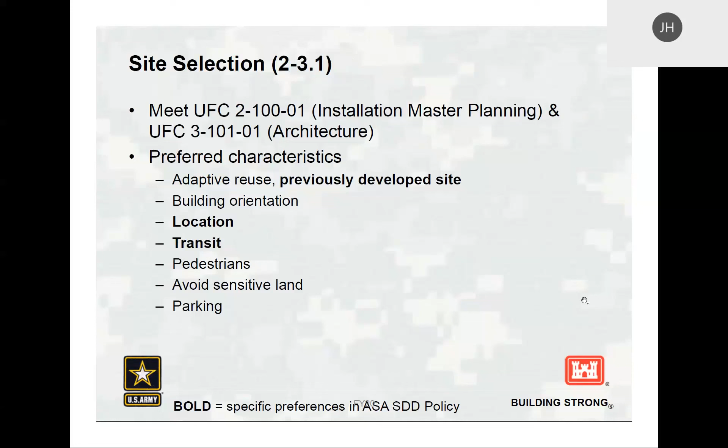Another thing that we're going to do today, as we're going through the UFC, is we are going to do a little bit of a cross-reference to LEED-related credits when it comes to each of the areas that we'll talk about in the UFC. And I do want to make sure that we know that what's in the UFC, that is our governing criteria, governing requirement.

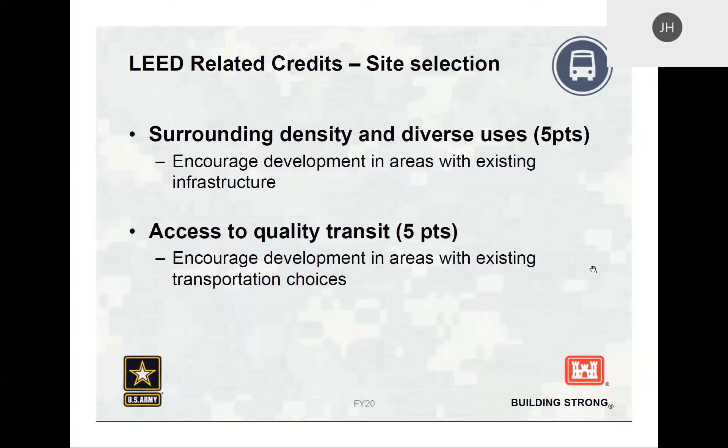Besides site selection, LEED also has credits related to site design. Some of the items we can incorporate into our site design are things such as bicycle facilities, reducing our parking footprint, and locations for green vehicles, ones that use alternative fuel sources.

For the bike requirements, if you're not familiar with LEED, we want our bike facilities to be within 200 yards of a bike network, to have short-term bike storage within 100 feet of our main entrance, long-term bike storage within 100 feet of a functional entry, and we want additional storage and shower requirements for the facility as well.

For the reduced parking footprint, we don't want to exceed the minimum local code for parking capacity, but we also want to provide a percentage reduction below the recommendations of the Parking Consultants Council.

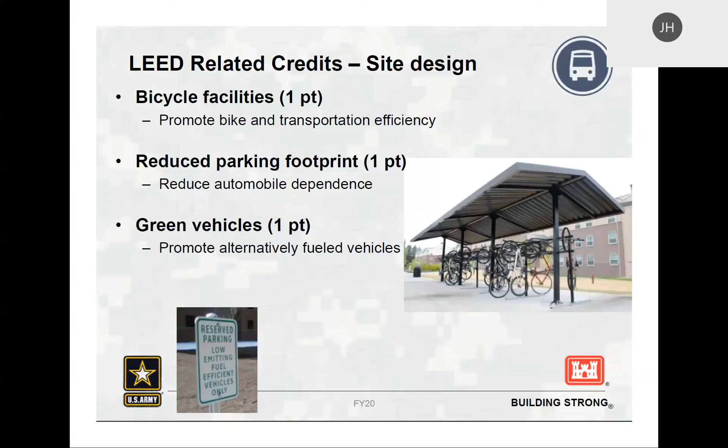For green vehicles, we want to designate a minimum of 5% of parking spaces for green vehicles, and we want to install electric vehicle charging in 2% of those spaces, or have liquid gas or battery facilities in 2% of spaces.

A couple more credits related to LEED for site design. For site development, we want to protect and restore habitat - that's worth 2 points potentially. What we're doing there is promoting biodiversity, and we want to try to restore 30% of the site identified as previously disturbed. Or we can also donate 40 cents per square foot for total site to land trust or conservation organizations in the region.

Another credit for 1 point is related to open space. With open space, we're encouraging interaction with the environment. We can do that by providing outdoor space that's greater than or equal to 30% of the total site, or a minimum of 25% of the site must be vegetated.

So when you look at LEED for location and transportation and sustainable site credits, we have a possible 26 points for how we locate our site and some of the design features that we can add to our site, out of 110 potential LEED credits.

When we break down those 26 possible points, 14 are impacted by our initial site selection - those factors of initial site selection can impact 14 of those credits - and then 12 we have design features that we can add into our site that may influence those credits as well.

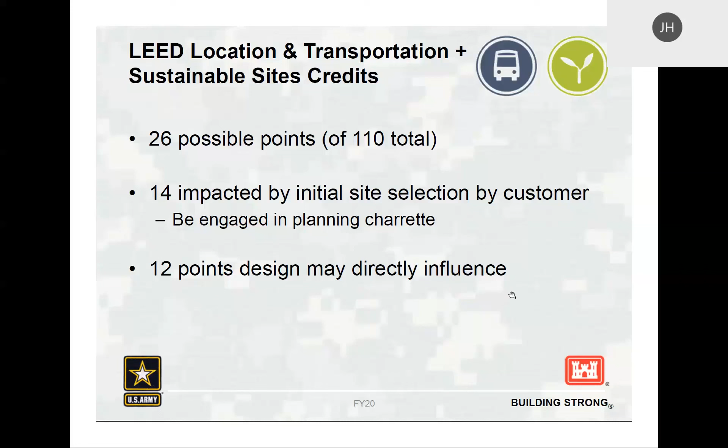All right, so focusing back to our UFC 1-200-02, our next section that we're going to look at is mitigating heat island effect. That's 2-3.2.

For those of you who are unfamiliar with heat island, I just want to make sure I'm not being presumptuous that everyone knows what that is. Heat island is the tendency of urban areas to be warmer in temperature than their surroundings. There's a lot of different reasons for that, but typically urban areas have less green space than open farmland or non-urban areas, so there's a tendency for them to have a higher temperature. We're trying to minimize that through our site design, and there's a couple of different strategies that the International Green Council, Green Construction Code, has identified as ways to mitigate the heat island effect.

And the first is through our hardscapes. Hardscapes are landscape features that are impervious or less pervious than just open land. What they've dictated is that 50% of site hardscapes should have existing or new trees to provide shade on them. So if we're going to have hardscape, we want at least 50% of them to be able to be shaded by trees that are either existing or new.

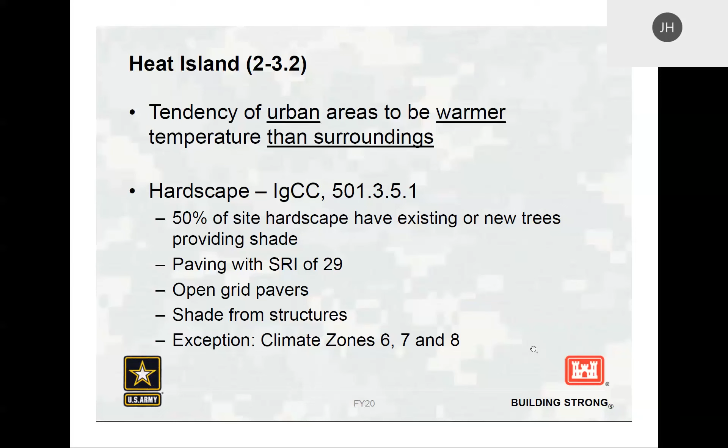One of the other ways that we can mitigate heat island effect is through walls. So if we're talking about the requirement for shading of walls, we want to shade 30% of our east and west above-grade walls up to 20 feet.

And 75% of opaque wall surfaces on the east and the west should have materials that have an SRI, solar reflectance index, of 29 or greater. And once again, we have some exceptions in areas where we don't get as much direct sunlight. So some of those climate zones 5, 6, 7, and 8 for the east wall, also climate zones 7 and 8 for the west wall. Shading is not required.

For roofs, the International Green Construction Code talks about trying to achieve a specified SRI, solar reflectance index, for roofs, and that depends on whether or not our roof is a flat roof or a steep slope roof. For flat roofs, we want to have an SRI of 78 as a minimum. The higher you go, the more reflective that surface is. So for a low sloped roof, we want more reflective surface. If it's a steep slope roof, then we need an SRI of 29 as a minimum.

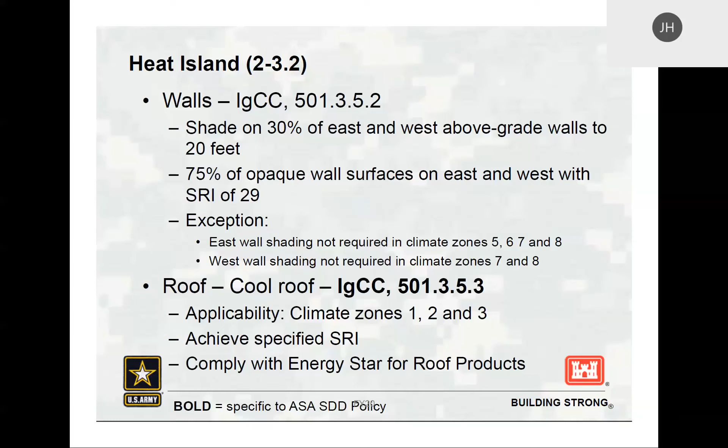So just a couple of pictures of some of these strategies for reducing heat island effect. The hardscape strategies we can use include planter boxes, things like that, where we're going to have hardscape but get some relief by having trees planted for shade.

We can use reflective paving. If you look at the picture here on the left, some of the pavers used there are really light, so they have a higher reflective index. And then we can also use an open grid paver system where we might have some kind of pervious material, whether it's grass or some other pervious material inside of that paver, to make it not quite as much total hardscape and have an open grid.

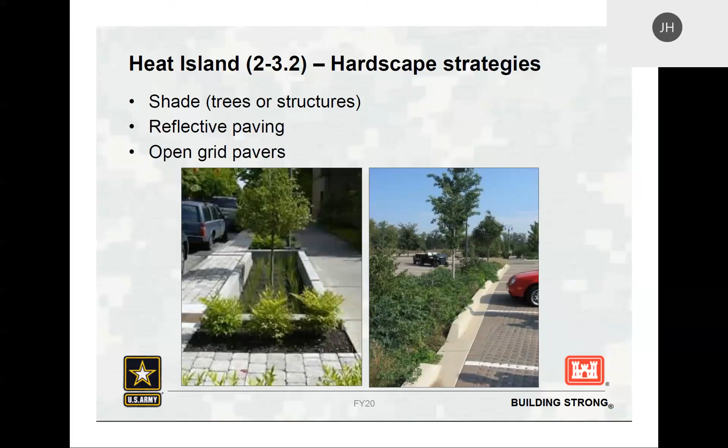Pivoting back to LEED and related credits when it comes to heat island reduction. The requirements for heat island reduction offer a possible 2 points, and we can achieve either 1 or 2 of those points: either we meet an equation for percent of hardscape with shade or reflectance to get 2 points, or if we place 75% of our parking under some sort of cover that's reflective, vegetated, or used to generate energy, we can get 1 of those 2 points.

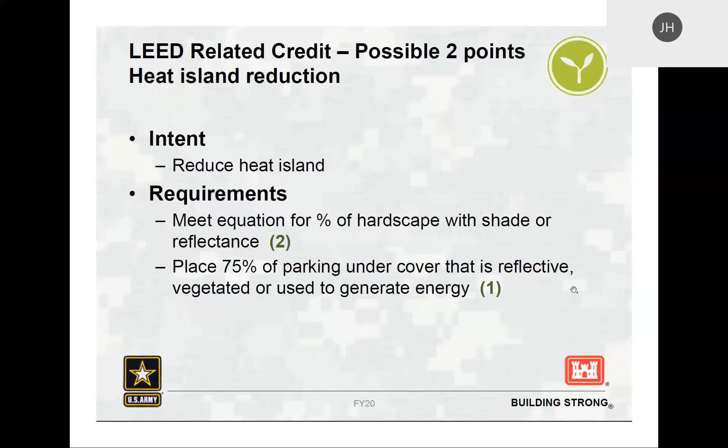Going back to the UFC, the next section under UFC 1-200-02, Chapter 2, is reduction of light pollution.

It's a good example of when you look at areas of high lighting density, just how much you can have as far as light pollution. What light pollution does is take away the ability to enjoy the night sky. If you've ever been in a city and tried to pick out stars or look up at the night sky, it's not quite as enjoyable as if you are on a mountaintop in the middle of nowhere and can see as many stars as you can imagine. So what we're trying to do with light pollution regulations is enhance that night sky experience and not have it hindered by things such as overlighting and non-directed lighting.

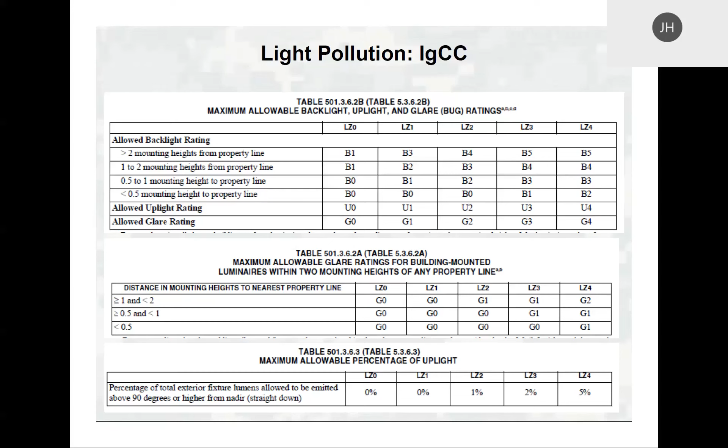The three main design considerations when we're talking about light pollution are glare, overlighting, and uniformity. Glare is not having our lights positioned in a way or location that's causing stress on people's views. Overlighting is having that lighting directed so it's applicable for the task it's intended for, and doesn't cast light into areas and views where it's not supposed to. And uniformity is so that we have a continuous and typical amount of light, so we're not casting large amounts of foot candles in one place and then having it vary back and forth.

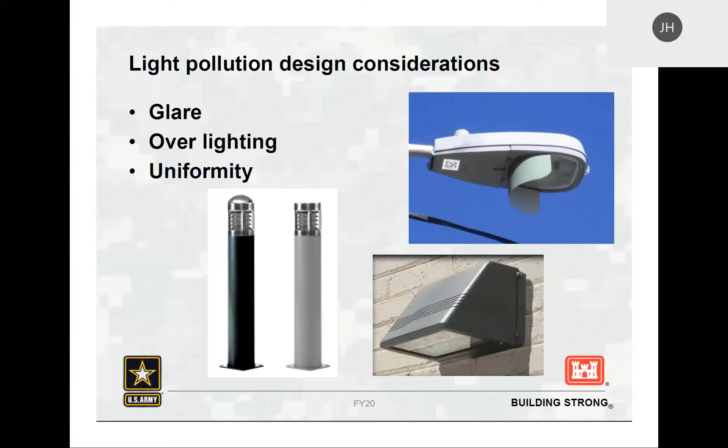So what you'll see on this slide and the next one are just two examples of lighting intensity. And so what you see is this is one for a building site. The next one you'll see is for a roadway intersection. So obviously along our building site, we have our lighting in certain locations, and the lighting intensity is brightest there.

And then our hope or the intent of limiting light pollution is that it's intense in the locations where it needs to be. And then as we get away from the areas where it's needed, we want it to drop off dramatically so that it's not overlighting locations where we don't need that same level of focus. So here we kind of see we have our building here. So we have lighting that goes around the perimeter of the building. We have lighting in our parking lot and along our entrance ways to the facility.

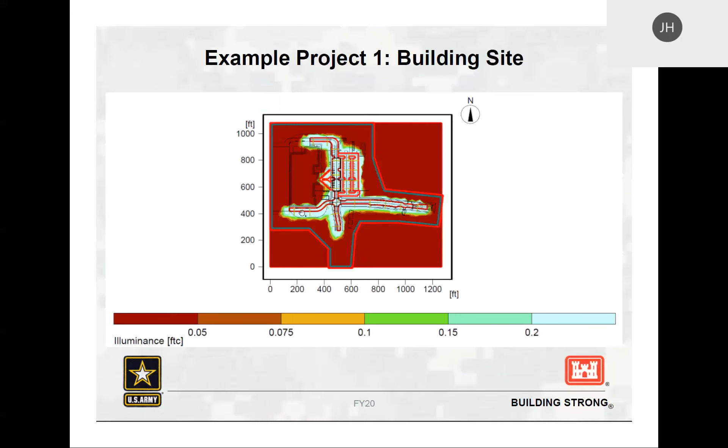We're looking at a roadway intersection such as this picture. We have lighting intensity leading up to the intersection, and then as we get a certain distance away, we want that to drop off so our intersections aren't casting light out farther than for those traffic interchanges.

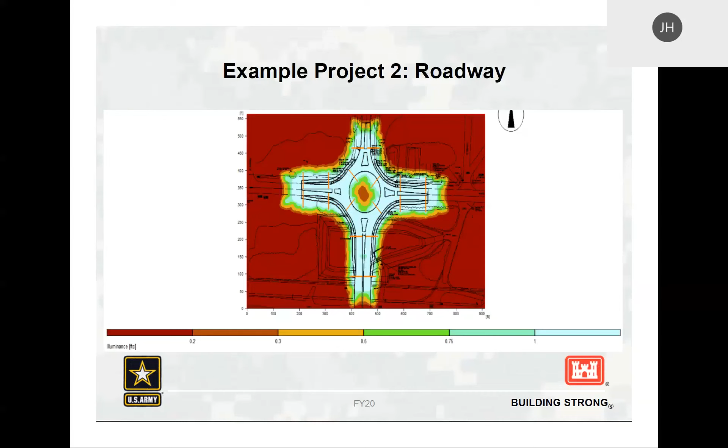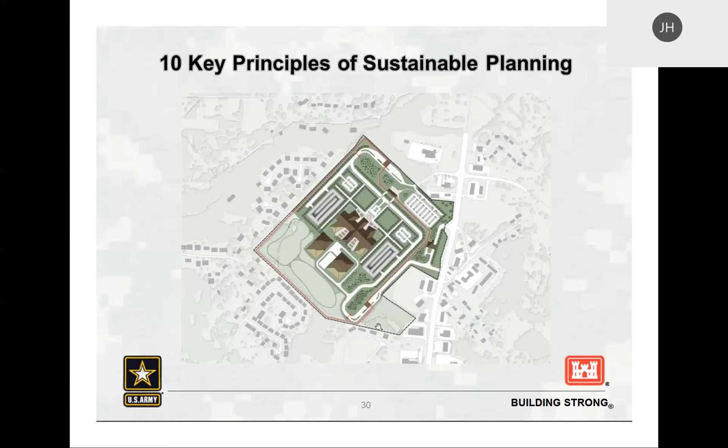So the first key principle is compact development. You wouldn't always know this because some installations have land for miles and miles, but installations really do need to conserve their land resources. Land is a commodity that we can't get more of, unless you are in certain countries where they try and build islands. But we are not one of those here in the United States. We have a limited amount of land, and so we have to conserve our land resources.

Whether that's installations reconfiguring current land use patterns or transportation systems within their developed areas to create opportunities for future development, we need to adjust that way of thinking. It's not to say we've got a lot of land, we're just going to sprawl out bigger, wider, more horizontal. We might need to look at more compact development patterns, whether that's multi-story buildings, greater residential densities, mixed uses, minimal space between buildings while still maintaining our ATFP requirements, or other constraints. We have to get creative. Compact development should be one of our key principles when it comes to master planning for our sites.

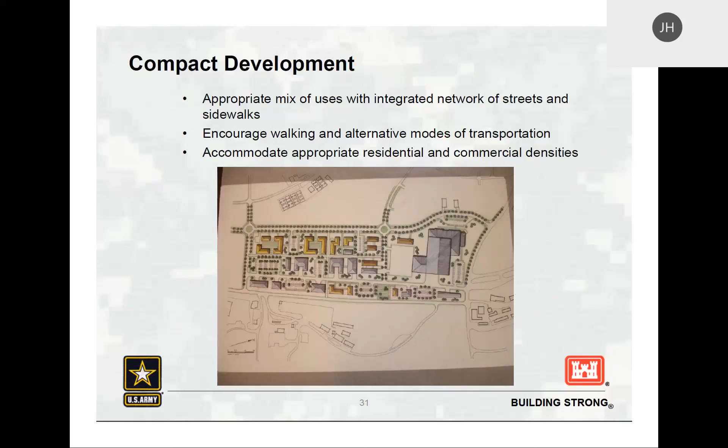Infill development. Infill development is where we plan development within our installation core. So not sprawling out farther and farther to the extremities, but forming an installation core and using previously developed land when possible. Typically, as we get out from that core, we're going to use more green space, so if we can avoid that, we can leave that green space in its current state. That might require removing or replacing aging or low density development with higher density development when needed.

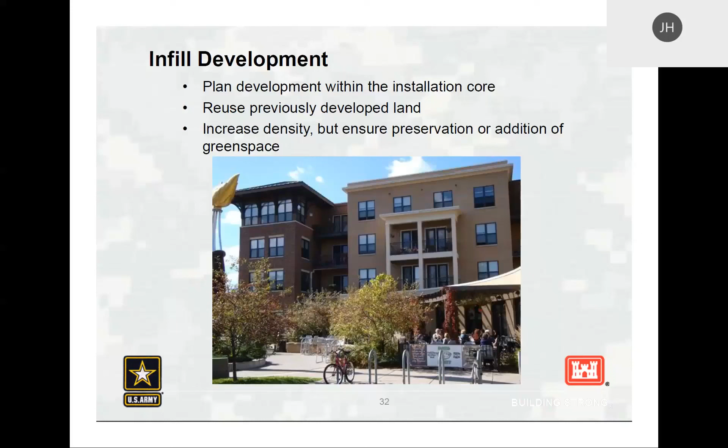This one, for military installations in particular, might not be as applicable, because we can't always control the location of our military installations, and some aren't right next to a major transportation hub. So transit-oriented development is a key principle, and when it's available, we want to place our development around transit corridors and places where it's readily accessible, but it's not always an option for all localities.

So, Jason, this is one item that ultimately varies a lot from installation to installation, but it can be applied at various scales. I guess maybe the point would be that even if it's a minor victory, placing a facility on a site that's got better access to transportation, whether that's public transportation or just established transportation corridors and things like that, may be a victory rather than placing it on a new greenfield, which, speaking from my experience, seems to be the more common trend on new MILCON type projects.

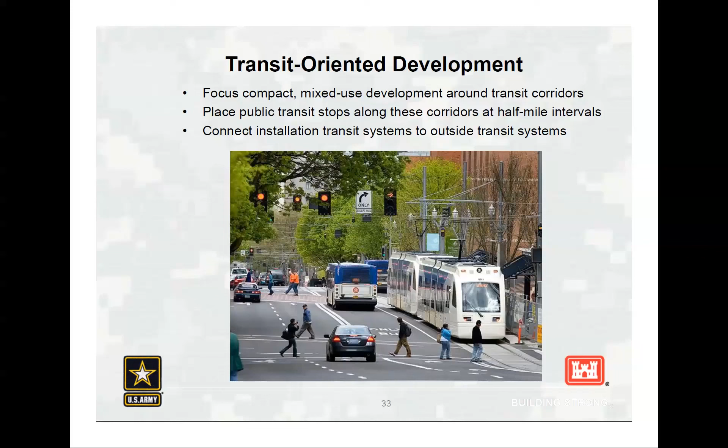All right, another key priority is vertical mixed uses. And so really this is one, like I said, for master planning, planners should locate compatible uses within the same building, which can be difficult in some of the MILCON that we do, because when you're talking about mission or funding variables, sometimes it gets a little bit tricky. But if we can achieve vertical mixed-use development, we need to try and synchronize that if we can.

An example would be if we did vertical mixed-use construction where we'd have maybe a ground floor education or training facility and then some kind of unaccompanied housing above it, where we could incorporate vertical mixed uses to maximize the use of the footprint that we're going to take out. All right, and then vertical mixed uses. Like I said, if we can maximize that footprint and have synchronized future projects that can build upon each other, we should always try to do that.

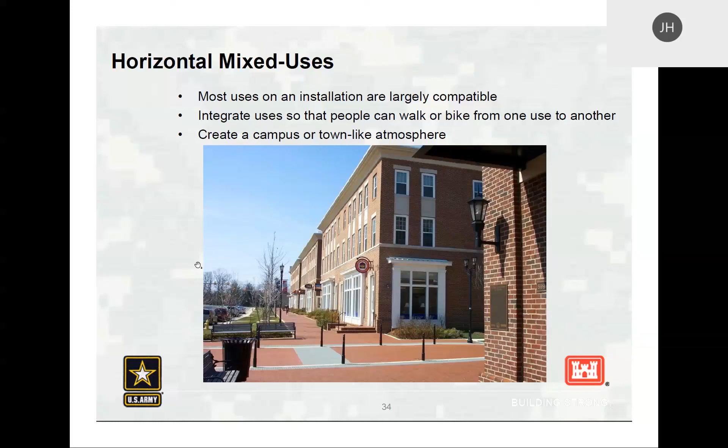So another one of our priorities is using connected transportation networks. A connected transportation network of sidewalks, pedestrian pathways and bicycle trails reduces the distance between origins and destinations, and it increases our transportation alternatives.

So if we only give people the option of driving a vehicle, we're going to have the maximum number of vehicles. If we give people connected transportation networks where they can use bikes and walking, those options will reduce the number of vehicles on the roadways in those areas. So whenever we can, we want to have connected transportation networks and diversity of those networks so that people can maximize all the options.

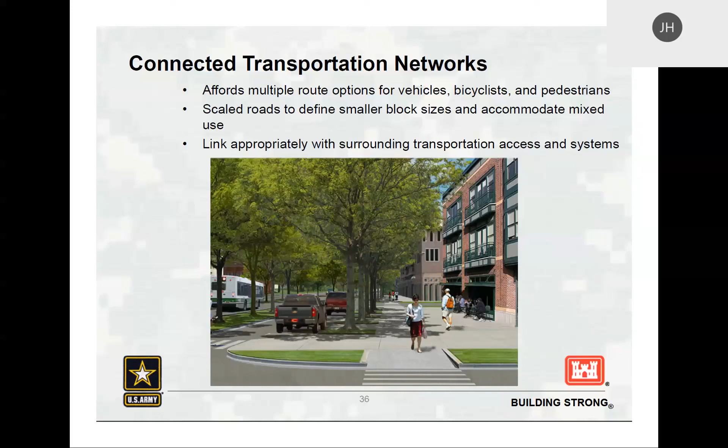We want to use sustainable landscape elements. And this is using street trees, shrubs, ground cover, and using plants that are suitable for the climate conditions and conserving water resources in the area that we're using.

And I would say from another perspective, when it comes to planning, not just using sustainable landscape elements, but planning to include maintenance of those sustainable landscape elements. I've heard it multiple times, and more times than I care to since I've come to the Corps of Engineers, but we're really good at building new things, and the military is not very good at maintaining new things. And so we would rather tear something down and build it new than maintain it for a long time.

And so I think that also applies to our landscape elements, whether it's bioswales or tree plantings or planter boxes or whatever it happens to be that we're using as a sustainable site landscape element. We need to put in place maintenance of those elements as well so that they function the way that we design them for sustainability, so that they are sustainable for the long term.

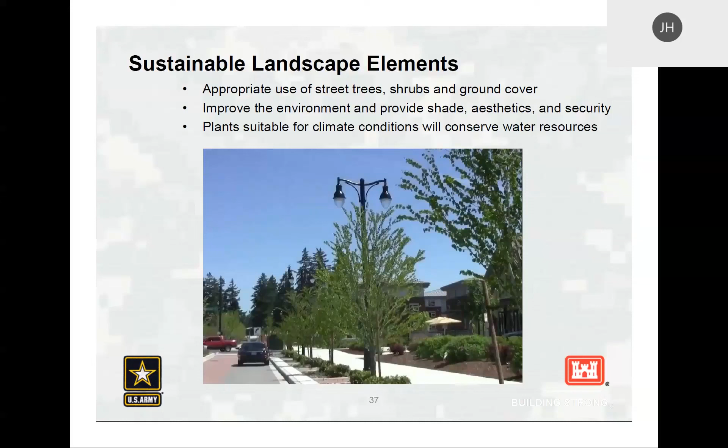And another part of our site development is low impact development and stormwater management. And so for low impact development, we're really trying to use as much as we can on-site natural features to control stormwater runoff quantity and quality. And our low impact development is governed by UFC 3-210-10.

And so, one of the ways that we can do that is to add 10% additional site to allow integrated management practices and identify those additional low-impact development costs on the 1391 during project planning, so that we have the funds in place from the very beginning.

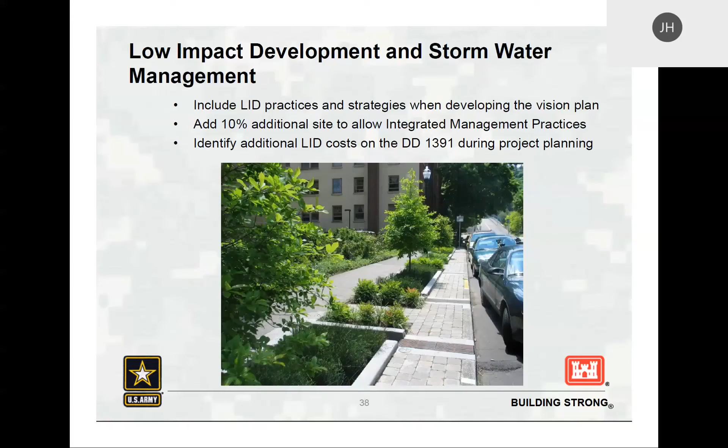Another key priority would be multi-story construction. And, like I said, since land is a valuable and scarce commodity, whenever we can do multi-story construction and maximize the square footage we're getting out of that footprint, the better from a land use perspective. And land efficiency improves so much with that multi-story construction.

And a lot of times people say, oh, well, we don't want to trigger the progressive collapse requirements by going over a certain number of stories. But if we limit ourselves to 3 stories and less, we are going to eventually find that condition is unsustainable from the land access and land availability standpoint. So if needed, planners and programmers should combine multiple users in multi-story buildings whenever possible.

So, for example, the campus that I'm on right now, one of the things that they really wanted to do was have a joint operations center, because currently the cyber commands of the military entities are all kind of in separate places and have their own facilities, and they work together, but NSA thought, well, if it's possible, why can't we put them all under the same roof?

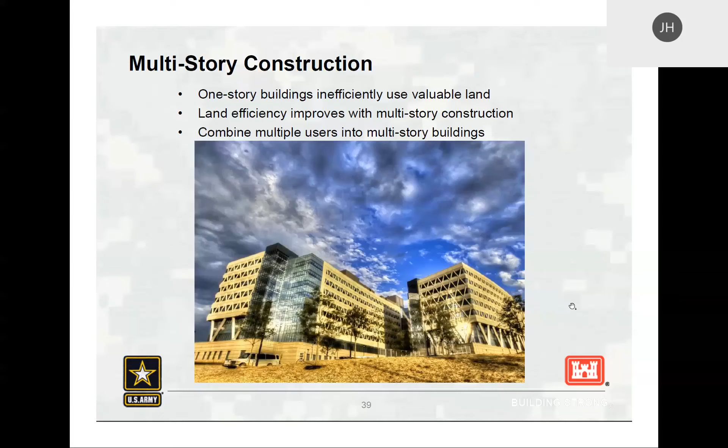So now they still have their own missions, but they can all be together and collaborate that much more easily, and we can put them all in one location where we can maximize the footprint of that facility. So one of our projects on campus does just that, where we combine multiple users into a multi-story facility.

So, Jason, I was just going to add, I see a comment here: progressive collapse is often an issue to overcome with multi-story. I think that's valid. It's something that has to be overcome, but a lot of times I'm not sure that it's an issue that's fully vetted at early stages, and it may impact your site selection. I've been in the room where the conversation is, going 4 stories, or 3 stories even, would require progressive collapse, so therefore we're going to avoid doing that.

That's probably not enough investigation, and especially early on in the planning process, you could give maybe a little bit more serious thought to the trade-offs between putting a taller building on an existing site versus a shorter building on a greenfield or something like that. There might be some real cost-benefit trade-off to be done there. Yeah, exactly. And yeah, that's one of those conversations that needs to happen early on, and if we can do that, we can look at the benefit and cost of that.

So the last priority from a master planning perspective would be building orientation and configuration. And I feel like from a site standpoint, this is one where we can really have an influence by the site that we select. And so if we can plan our sites to provide flexibility, it allows us to do a lot with our building orientation and the configuration.